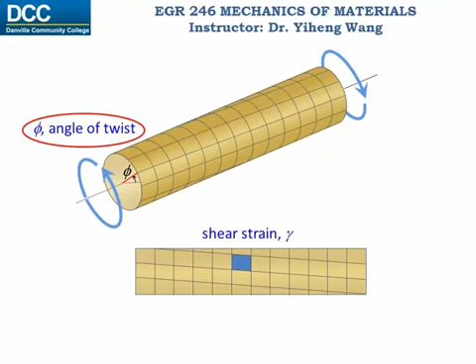If you recall, in an earlier video, we mentioned the angle of twist, which is the clear indication of the deformation of this shaft under applied torques. How do we determine this angle of twist?

Again, if you still remember, when we were deriving the torsion formula, we got to this step. And also, according to Hooke's law, tau equals G times gamma. G is the modulus of rigidity, which is a constant for a material. Gamma, again, is the shear strain.

And also we know the torsion formula now, tau equals T, the internal torsional moment, times rho, the radial position, over J, the polar moment of inertia of this entire cross-sectional area. Based on all these, we can derive that d phi equals this, and then lastly T over JG dx.

Therefore, if we want to find out the angle of twist of one end of this shaft, say end B, which is at x equals L, relative to the other end, say end A, which is at x equals 0, then the angle of twist of B relative to A equals the integration of d phi along the entire length of the shaft from x equals 0 to x equals L, which equals the integration of T over JG dx.

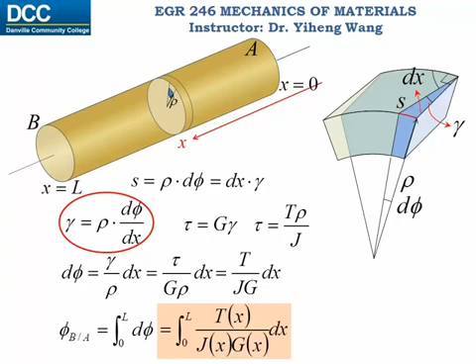Here, T again is the internal torsional moment, which is a function of position. J, the polar moment of inertia, and G, the modulus of rigidity, could also be functions of location, since sometimes there could be cross-sectional change in this shaft, or the shaft could be a composite shaft made of several different materials with different G values.

If you compare the torsional deformation to axial deformation that we learned earlier, there are many similarities, and hopefully this can help you memorize the equations associated with torsional deformation. First things first, the normal stress is defined as the normal force over cross-sectional area. The torsion formula can also be rewritten in this form. Here, the numerator T is also an internal reaction, which is the driving force for deformation, and the denominator J over C is the combination of geometric properties of the cross-sectional area.

The axial deformation, delta B relative to A, the displacement of one end relative to the other, equals the integration of N, the internal normal force, over A, the area, and E, Young's modulus, integrated from one end A to the other end B. Angle of twist of one end B relative to A, again, equals the integration of T, the internal torsional moment, over J, polar moment of inertia, which is a geometric property just like the area, and G, the modulus of rigidity, similar to Young's modulus, again integrated from one end A to the other end B.

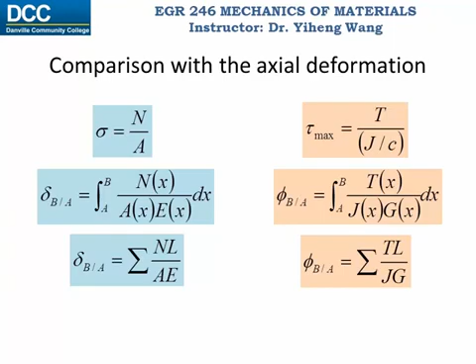And both equations can be reduced to this summation form if there are several segments, and within each segment, the internal reaction is constant, the geometric property is constant, and the material property is constant. And if you only have one segment with constant internal reaction, constant geometric property, and constant material property, then these two equations reduce to this simple form.

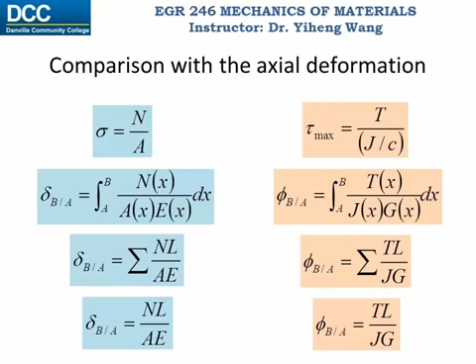Let's look at this example. For this composite shaft subject to multiple applied torques as shown, we need to determine the angle of twist of end D relative to the fixed end A. If we want to determine the angle of twist, we need to determine the internal torque as a function of position. And if you recall, we have done this in a similar example problem in the earlier video. And here's the result. Internal torque determined as a function of position, shown in this internal torque diagram.

As you can see, here we have three segments. Within each segment, the internal torque is constant, the geometric property is constant, and the material property is constant. Therefore, we're going to use the summation form of the equation to determine the angle of twist, and substitute in all the values for the internal torsional moment, the polar moment of inertia of each segment, and the modulus of rigidity G for each segment.

Keep in mind here, it's important that you keep the negative signs in the internal moment, because a negative sign indicates clockwise rotation about the x-axis and a positive sign indicates counterclockwise rotation about the x-axis. Therefore, when we do the calculation, the answer is negative 2.08 times 10 to the negative fourth power, in radians.

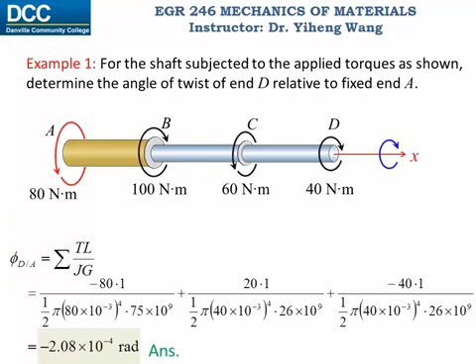Let's look at this example. For this cylindrical shaft subjected to the distributed torque as shown, we need to determine the angle of twist of end B relative to the fixed end A. In this case, the distributed torque is not uniform. It actually has a linear intensity given by the equation t equals 120 minus x pound-inch per inch. But just like any other problem, we need to first determine the internal torque as a function of position x.

Again, we start with the free body diagram of this shaft. Draw the unknown support torque at the fixed support, TA, again drawn in the positive direction, counterclockwise. Moment equilibrium about the x-axis. Here, the resultant torque of this applied distributed torque is determined by integrating the torque intensity from 0 to the total length, 120 inches. And from here, we get TA equals 7,200 pound-inch.

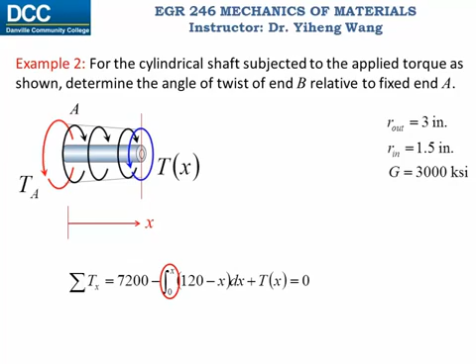Then we need to use the method of sections again to determine the internal torque as a function of position. We expose the unknown internal torque Tx, again drawn counterclockwise in the positive direction, and then we do the torque equilibrium about the x-axis. Here, the resultant torque of the applied torque over this segment from 0 to x is determined by the integration of the torque intensity from 0 to x. And from here, we can determine Tx as a function of x.

For this problem, we have to use the general form of the angle of twist equation to determine the angle of twist of end B relative to end A. It's the integration from A to B of T, the internal torque as a function of position, over JG. Both J and G in this case are constants. Therefore, we substitute the numbers, do the integration, and get negative 8.05 times 10 to the negative fourth power radian. And that's our answer.

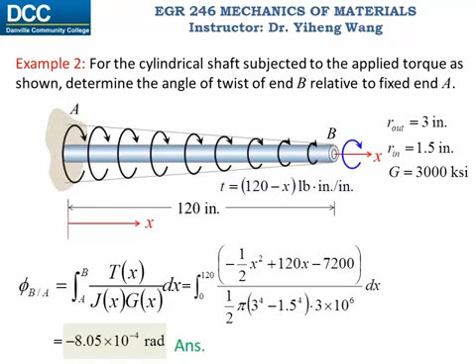But what does that mean? Again, our chosen x-axis is in this direction. Therefore, a negative angle of twist indicates a clockwise rotation about this x-axis. In other words, end B, when compared to end A, has rotated to the right.